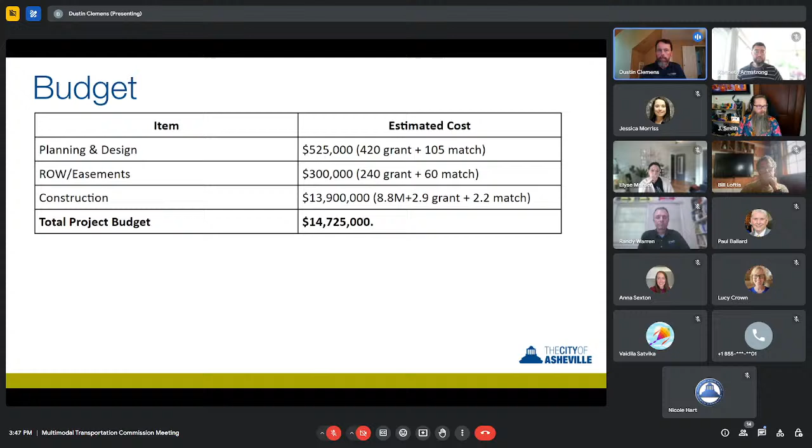We're sort of slow rolling this early design because we want to work really closely with NCDOT to make sure anything we're proposing is going to be what they would consider an eligible expense, because we don't have a lot of extra money on this project outside of the match money and the TPDF money I mentioned earlier. So we need a really high level of confidence that everything we're proposing will be considered a reimbursable expense from NCDOT.

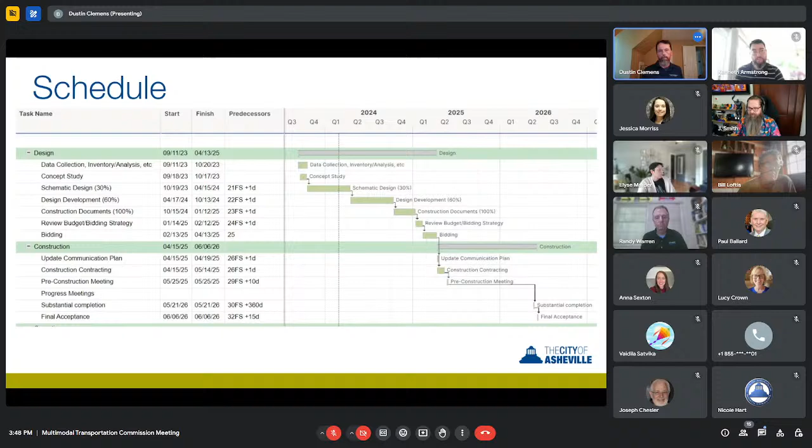In terms of scope for the project, we're anticipating the whole corridor of Coxe Avenue from right-of-way line to right-of-way line, so it's a fairly wide right-of-way through this section. There's very deep stormwater services that will have to be upgraded and replaced. There's also a water main going down Coxe Avenue that we anticipate our water department will upgrade at the same time, which is a great opportunity to share some of those expenses for the repaving of Coxe Avenue when that happens.

In terms of phasing, I mentioned earlier we don't anticipate the budget we have right now will pay for construction of the entire corridor. We do plan to design the entire corridor, and once we start to get some more high-level, confident cost estimates, we can talk a little bit more intelligently about what the phasing will be.

We anticipate we would start with the southern portion of the project, hopefully making it up to Hilliard Avenue in the first phase. North of Hilliard would probably be a future phase, which could work out really well because there's some pretty significant development potential in the works for some of the county-owned and city-owned properties north of Hilliard. So it makes sense to let that development evolve a little bit before we go in and build a lot of new infrastructure within the right-of-way.

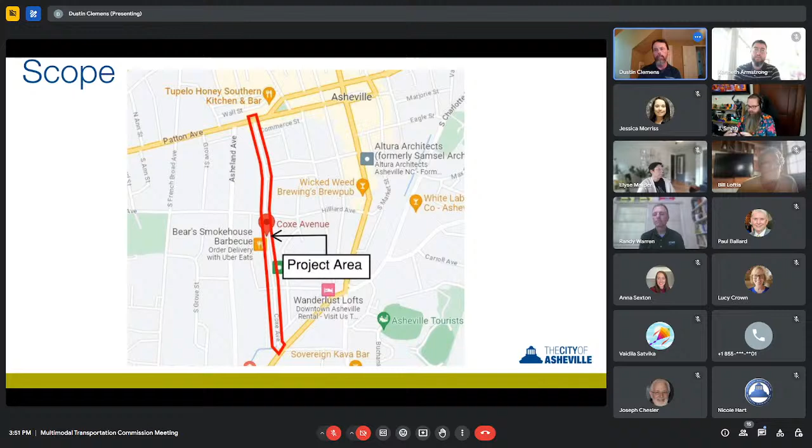It's not something you have to do all at once. If anything, we would be upsizing the stormwater system, and it would make sense to do that from the low point up. Generally, with constructing any stormwater system, you want to start at the low point anyway. So that would work out then? That'd be good, yeah, it would.

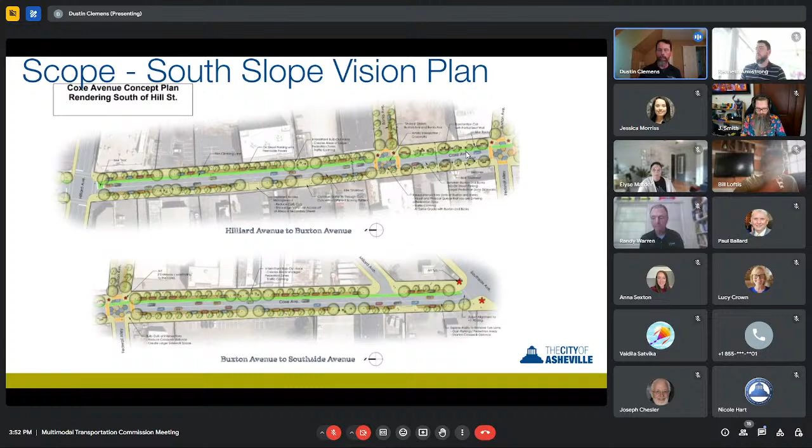In terms of informing the design of the scope I mentioned earlier, there's been an effort, maybe 4 or 5 years ago or longer, with the South Slope Vision Plan, where city staff received a lot of feedback from the public on the overall vision plan for South Slope. Within that plan was a whole chapter devoted to Coxe Avenue and what we'd like to see there, so we had a really good starting point in terms of design intent by picking up that vision plan and running with it.

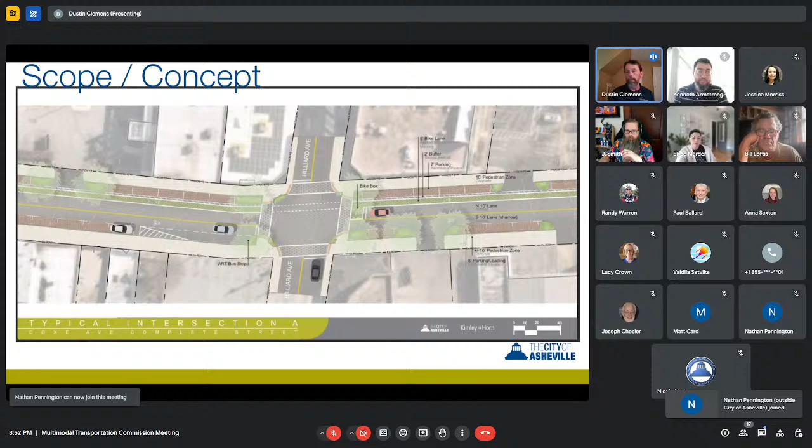This is some of the early concept development we've used, playing off that vision plan, giving you an idea of a typical cross section we'd expect with the new project. As you can see, we're widening the pedestrian areas to 10 feet consistently throughout the corridor, preserving as much on-street parking as we can, and trying to consolidate loading zones wherever possible. We're also adding quite a bit of new bump-outs that could serve as stormwater filter areas, plus a 5-foot climbing lane with thermoplastic marking and a buffer between that climbing lane and the on-street parking on the east side of the roadway.

So this is a typical section of what we'd expect. Of course, each intersection will have a little variability, but the idea of having a sharrow situation on the downhill lane and a dedicated climbing lane on the uphill lane is what we've picked up from the vision plan and moved forward with.

Randy: I brought this up when this came to the Active Transportation Committee as well. I think sometimes in the past the city has emphasized the climbing lane and de-emphasized the descending lane due to a misconception or lack of encouragement for multimodal transportation. Sometimes we feel like bikes can go as fast as cars downhill, so why can't they just share the lane? But in order to give bicycles an advantage, so people might think maybe I should get out of my car and get on a bike, if there's a separate bike lane going downhill where they can bypass cars and congestion, that actually encourages people to ride bikes rather than it only being as good as being in a car. So I want to strongly encourage us to have bike lanes in both directions, because we want to make bicycling a better option, not just avoid cars hitting bikes. Having bike lanes that bypass congested traffic helps that happen.

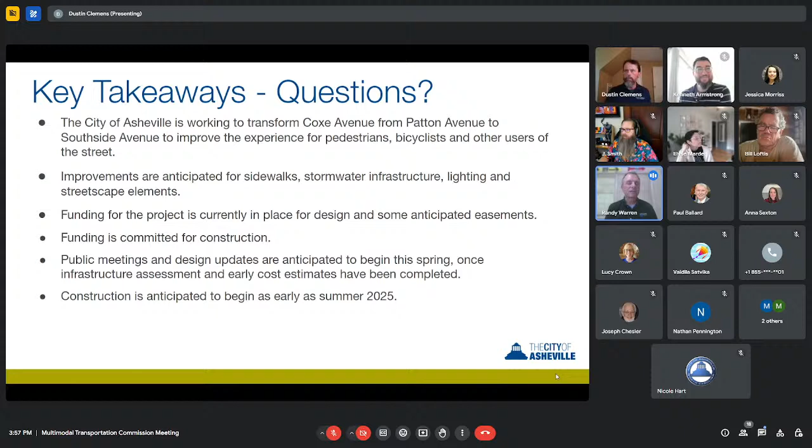But I guess having a separated bike lane provides another incentive to ride because you feel safer from traffic, since you've got a physical barrier between a person using the bike lane and motorized traffic. But for me personally, I'd rather have lanes on both sides of the road, because North Carolina law says you can only pass if you have a separate lane, for example, on the right side of traffic. So it creates a legal situation in which a bicycle can go by someone on the right if you have a descending lane. But if we couldn't do that, the next thing to me would be to put a separated lane on the climbing lane, to at least provide a greater sense of protection for people that would use the bike lane there.

Yeah, and those are great comments. What I tried to articulate in my earlier comments, and probably didn't do a great job, is that like Paul mentioned in his introduction, every community will always have budget constraints. There's never a project that has enough money. It just doesn't happen. And that's not the only limiting factor. I think the other equally limiting factor on this project, and really any other project we're going to work on, is existing right-of-way and existing constraints.

And if we wanted to put a bike lane on each side, that means we would have to sacrifice something else, and that sacrifice would either be on-street parking on one side of the road or pedestrian sidewalks. There's not an opportunity to acquire additional right-of-way on this corridor. So it's the balance of trying to balance parking and loading zones, safe pedestrian zones, safe bicycle zones, and safe transit of all modes.

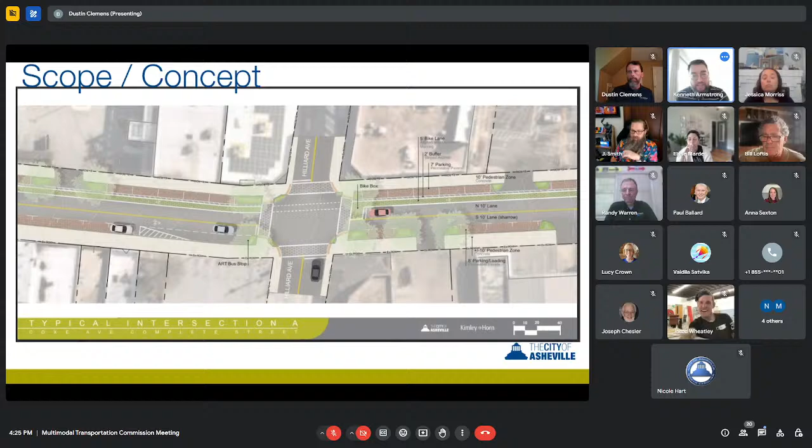Dustin, if there's nobody else dying to chime in, I'm eager to jump into the next thing. We have a quorum now too, so we can make some votes retroactively. But does anybody have anything else for Dustin? Nope. Okay, thank you Dustin.

Thank you all. I think sometimes we don't mean to be adversarial at all. Dustin, we so appreciate what you do, and I never want to take away from that. We have strong opinions and we voice them, but hopefully it's always in an atmosphere of respect and appreciation for what you do for us, even if our tone doesn't always sound like that when we're advocating for what we believe in. So thank you. That's exactly how I took it, Randy. I appreciate the comment anyways, and thank you all very much. I appreciate the back and forth and the different comments. Thank you, Dustin, have a great afternoon.

Jessica, I see we have a quorum now, and county staff has jumped back on. Is that with the intent of going back on the agenda? Oh, I didn't realize. Sure, yeah, if we could do that quickly, I'm comfortable with that, as long as Joseph is still here. So we have a quorum now. I'm still here, I apologize to everyone for being late. Go ahead.

That's okay. Matt or Nathan, are you ready to jump into the item we kind of skipped over? Yeah, that would be great. Thank you, okay great, thanks for coming back. Okay, hold on one second. So in your agenda packet, you have links to some of the documents I'll be going over today. Let me change this to slideshow mode.

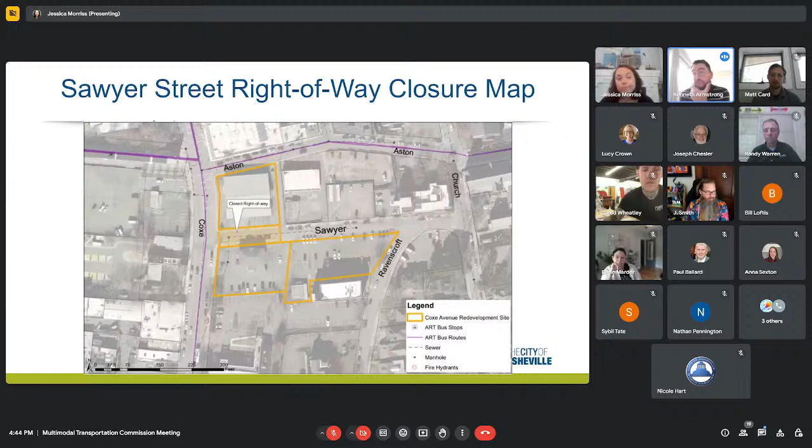Any other comments on this project? If not, I would entertain a motion.

I move to recommend City Council approve the requested closure of 140 feet of Sawyer Street between 50 and 52 Coxe Avenue. Do we have a second? I will second. Elise made the motion, Joseph seconded. Any other final thoughts? Okay, we'll do a roll call vote.

Who's first? I'll go first, I'm an aye. Joseph? Aye. Bill? Aye. Great. Elise? Aye. Randy? Aye. And that's all of us - quorum. Unanimous. All right, motion carries.

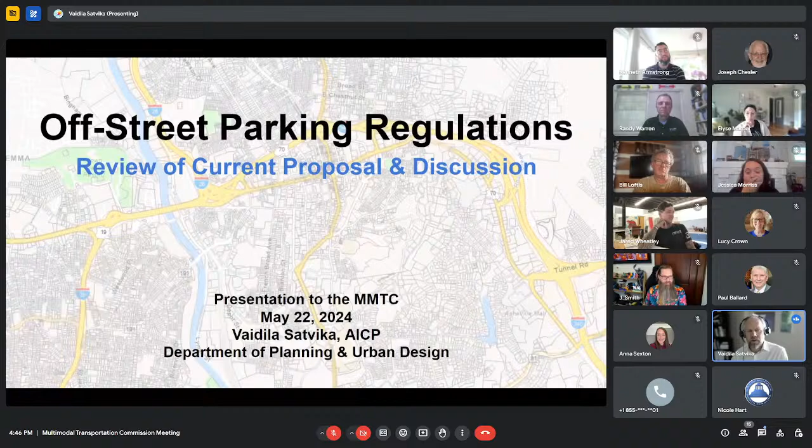This is coming really primarily from the Planning and Zoning Commission as a concept for the city to consider, so you can think of this as a preliminary discussion. To begin, let me give you an overview of what the city's current regulations are.

Under the zoning code section 7.8, there are standards for every zoning district that define what your parking or loading standards are. It basically says parking and loading standards shall be provided as required by section 711. So you go to section 711, which is below here, and we list every use in our table of uses and then define the minimum and maximum number of parking allowed. This is a snippet from that code - it's a very long table.

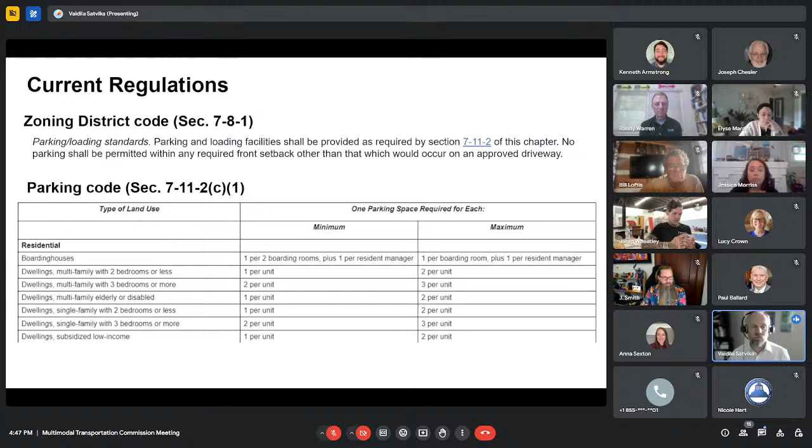For example, if you have a single family dwelling with 2 bedrooms or less, you have 1 parking space for a minimum and 2 for a maximum. So that's where we stand today.

There is what I'm calling an exemption that's on the books in section 711 for urban residential developments. It says if you're located within this area shown on the map, within a mile of the central business district, between the river and the mountain north and south - this black dotted outline - effectively you don't have to provide off-street parking for residential development.

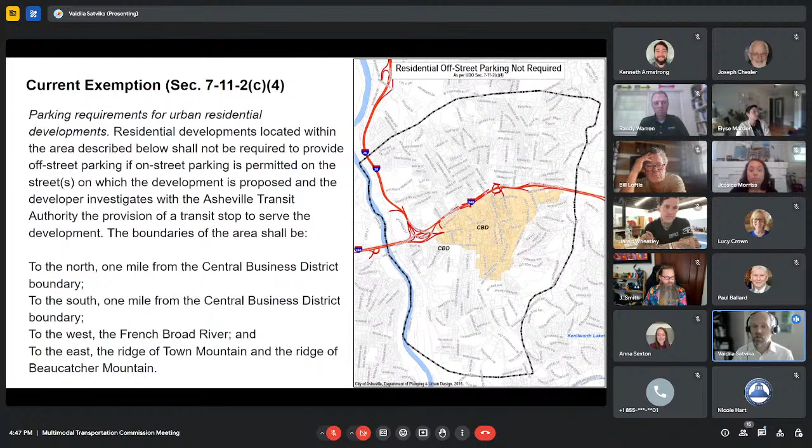So this has been on the books for quite a while. To let you know how it's working, we did a little bit of analysis within this area. This isn't looking at every project in the last 30 years, but to give a general sense, we broke down lots of different projects, many mixed use developments. You can see the address on the left, the number of housing units, and the third column is the total residential parking that would have been required, since parking is not required in this area.

And then the parking required for commercial use, because this area does not exempt commercial parking, and then the parking actually provided. What you can see is that all the projects provided parking anyway, even though off-street parking isn't required for residential. And 38% of the projects provided less parking than would have been required. This shows a mismatch from our current standard, and you could argue it makes sense to reduce parking, if not eliminate it.

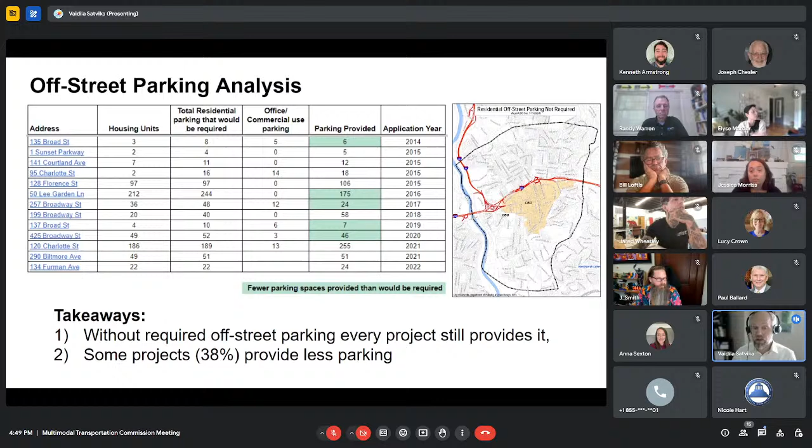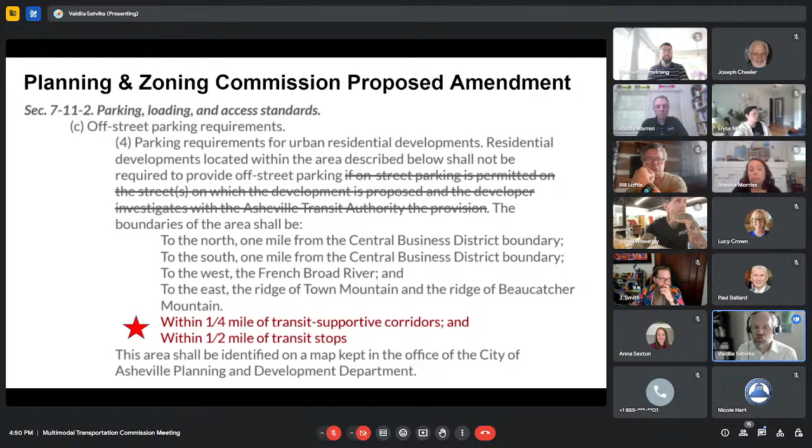So this brings us to today. The Planning and Zoning Commission came to us with recommendations, looking at our current section 711.2, suggesting we consider expanding this off-street parking exemption for residential within a quarter mile of transit-supportive corridors throughout the city, and within a half mile of transit stops.

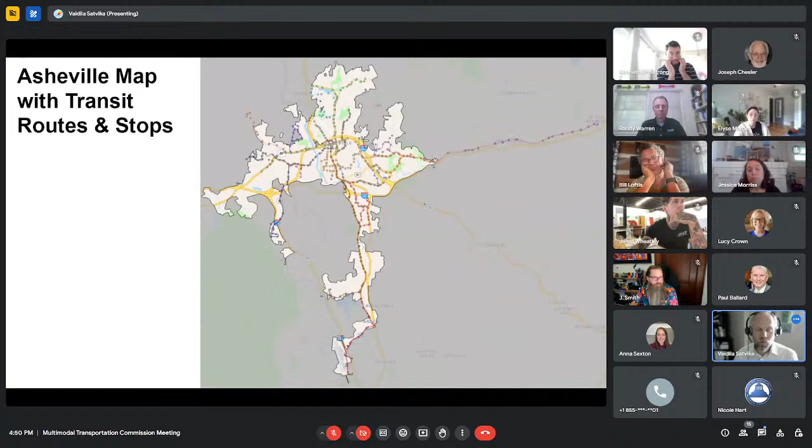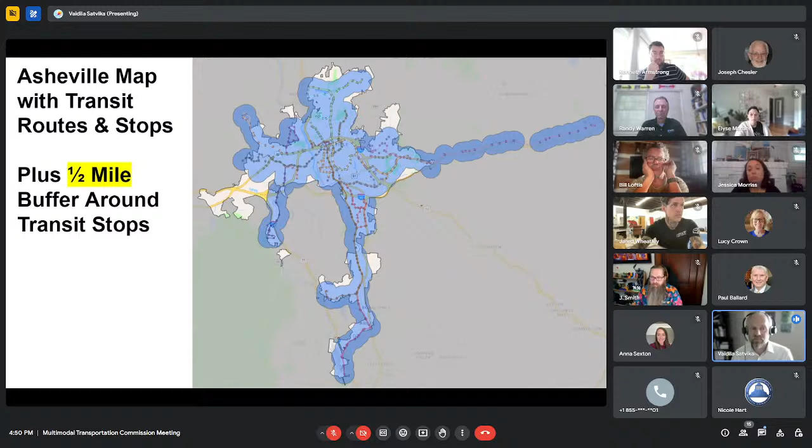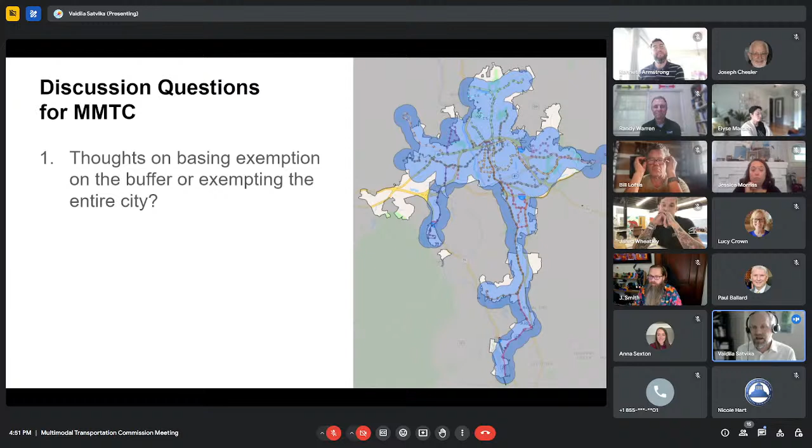I have a couple slides with questions, then we can open it up. This begs the first question, which came up at the Planning and Zoning Commission: would it make sense to create a standard requiring quantifying whether a project is within or without the district, or should the entire city just be exempted? We could quantify and get data on how many parcels would be outside of this, but that's one question for discussion.

Another question that came up at the Planning and Zoning Commission is whether this should only apply to residential parking or also include other uses or all uses. With that, I'll turn it over to you. This is proposed to go to the Planning and Zoning Commission next month for refinement and further discussion, so this is a great opportunity to weigh in. Thank you.

Thanks, Vaidila. Anybody have any thoughts? I'll chime in. When you showed me that map of where the exemptions along the transit line fit, my first thought was, well, that's like the whole city, except for the interstate over there and a couple pockets. But if it simplifies the process to make it a citywide thing, I'm all for that.

I also appreciate you talking about how the market kind of resolved the issue in a way. If you leave it to the free market, it might actually work out in the end. Elyse, you had your hand up.

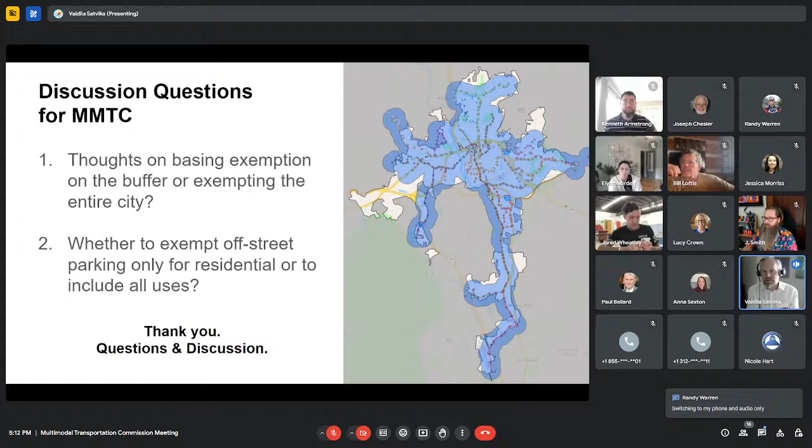A lot of people cite that transit needs at minimum 8 to 12 units an acre to support transit, especially BRT or more. We're currently reviewing land use changes based on a missing middle housing study and an affordable housing plan we're rolling out. As we make changes to allow more construction in Asheville, keep in mind that two-thirds of our residential districts only allow single family. It's very difficult to catch up to a residential density that can truly support transit, so both changes have to happen together. This is an opportune time, because transportation changes support more construction of residential development.